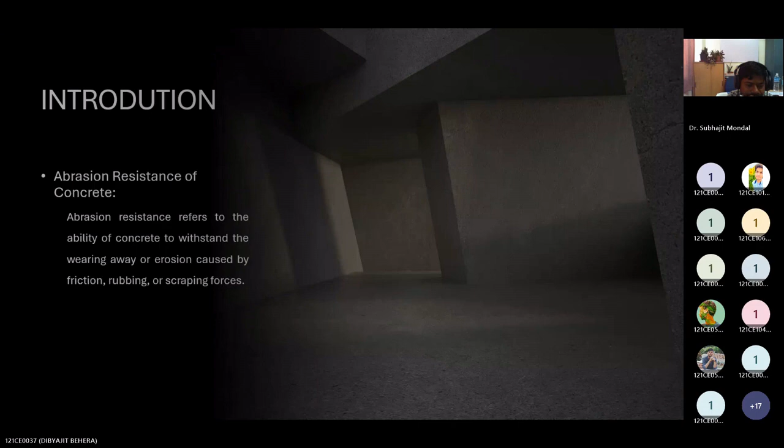Importance of abrasion resistance: first, durability and longevity. In high traffic areas, industrial floors, pavements, and transportation infrastructure, concrete is often exposed to constant friction and abrasion. Improving resistance to wear helps extend the service life of these structures, reducing maintenance and replacement costs.

Next is cost saving. Structures with high abrasion resistance require less frequent maintenance and repairs. Safety consideration: in transportation infrastructure, road surfaces with good abrasion resistance provide better skid resistance, reducing the risk of accidents. In industrial settings, a durable, abrasion-resistant floor contributes to a safer working environment, minimizing the chances of slips and falls.

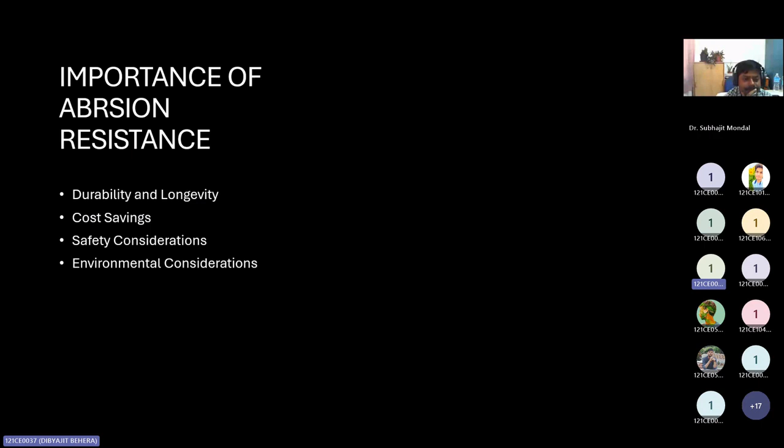Next is environmental consideration. Reduced wear and abrasion means fewer particles are generated from the concrete surface, resulting in less dust and particulate matter. This can have environmental benefits, especially in urban areas where air quality is a concern.

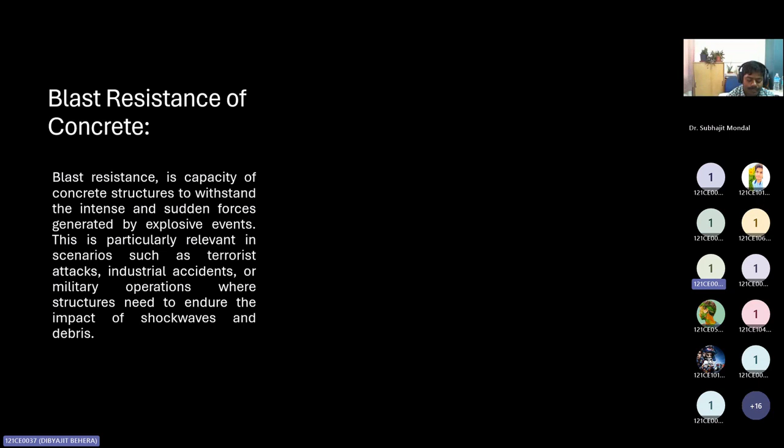So, what is blast resistance? Blast resistance is the capacity of concrete structures to withstand the intense and sudden forces generated by explosive events like terrorist attacks, industrial accidents, and military operations, where structures need to endure the impact of shockwaves and debris. The design and construction of blast-resistant concrete involve considerations such as material strength, ductility, and energy absorption capabilities.

The goal of blast resistance is to create structures that can effectively absorb and dissipate energy during the blast, protecting occupants and preserving the structure of the building.

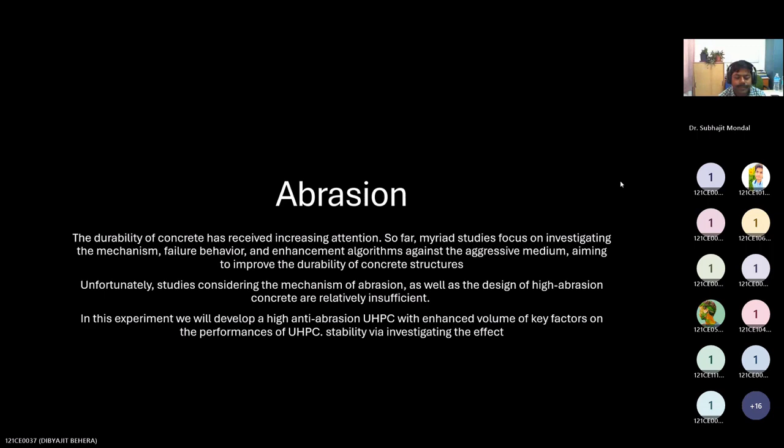Moving on to the next slide, I would like to discuss the factors affecting abrasion resistance.

First and foremost, aggregate types and sizes. It is shown through research and experiments that coarse aggregates and hard aggregates are more resistant towards abrasion materials.

One of the major factors which plays a crucial role in abrasion resistance of concrete is the cement content and its type. It is shown through research and experiments that concrete having a high cement content has more abrasion resistance.

One of the other factors is the water cement ratio. A high water cement ratio causes high porosity, increasing the voids in concrete, which is more prone to abrasion. So it is recommended that the water cement ratio be kept low so that it adds more resistance against abrasion.

One of the major factors of abrasion resistance is surface finishing. It plays a crucial role, because if the surface is smooth, it will have less friction against wear and tear from abrasion materials, making it highly resistant against abrasion.

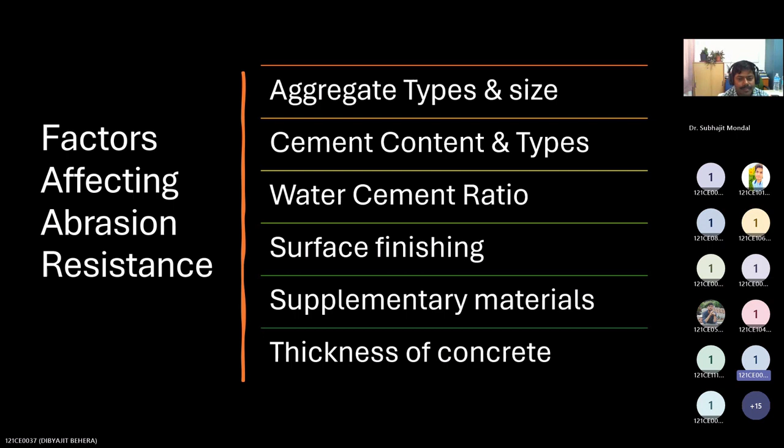Other factors include supplementary materials and thickness of concrete. There is a lot of influence of aggregates and cement type on concrete, such as in rubberized concrete, which showed better abrasion resistance than the control mix.

Water cement ratio did not significantly influence abrasion resistance, with higher ratios resulting in increased resistance. Weak bonding between cement paste and crumb rubber did not affect abrasion resistance, despite impacting compressive strength.

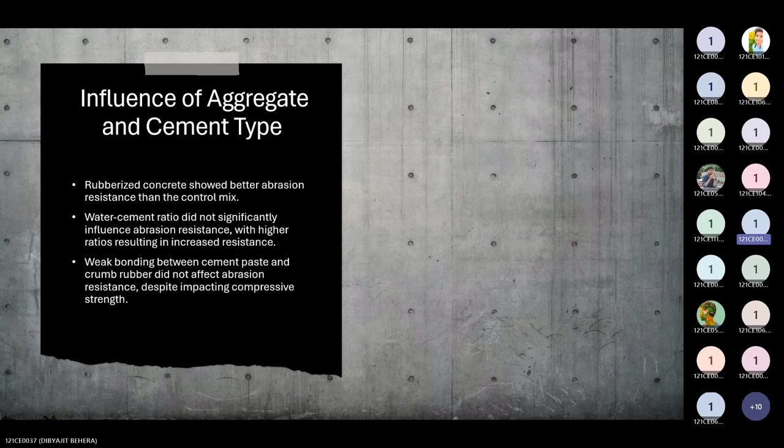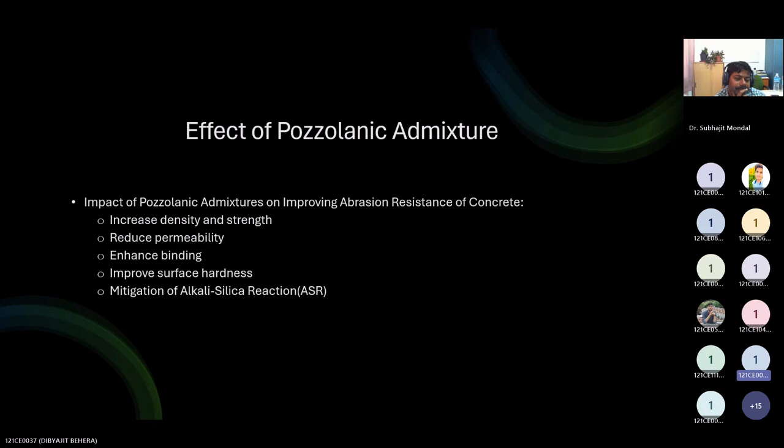Pozzolanic admixture is a material that, when added to concrete, reacts with calcium hydroxide and forms cementitious materials, which benefit the concrete by increasing its density and strength, reducing its permeability, enhancing binding, improving surface hardness, and mitigating alkali silica reaction, leading to high abrasion resistance of the concrete.

Now I would like to discuss recommendations for improving abrasion resistance. First, aggregate selection: we have to mind the aggregate selection by choosing coarse aggregates and harder aggregates so that the concrete has more resistance towards abrasion.

We have to use pozzolanic admixtures, for example fly ash and silica fumes, so that it has more resistance against abrasion. We have to adjust the water cement ratio and enhance the surface finishing, making it more smooth so that it has less wear and tear against abrasion materials.

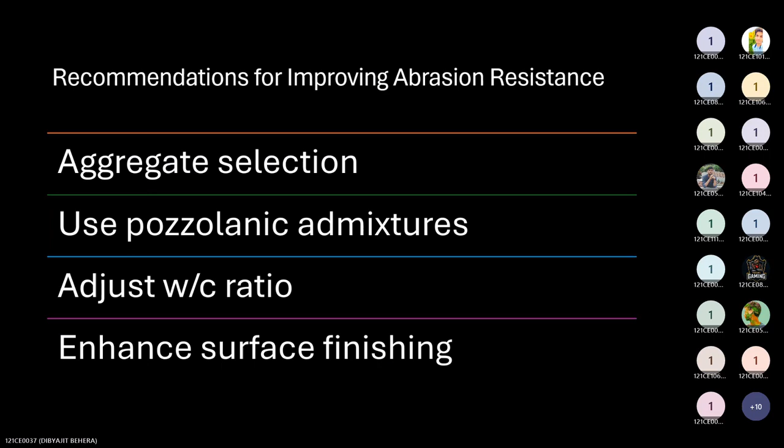In this research, we are mainly focusing on three experiments. First is ASTM C944. This test involves rotating a cutter assembly against the surface of a concrete specimen under a constant load. The mass loss of the specimen is measured and used to calculate the abrasion resistance.

Another experiment is ASTM C1138. This test involves the use of a specified abrasive material, such as carborundum grit, under controlled conditions to abrade the surface of the concrete specimen.

Last but not least, the ASTM D968 experiment. This test involves dropping abrasive particles onto the coated surface under controlled conditions. The extent of the coating wear or damage caused by the falling abrasive is then evaluated to determine the abrasion resistance.

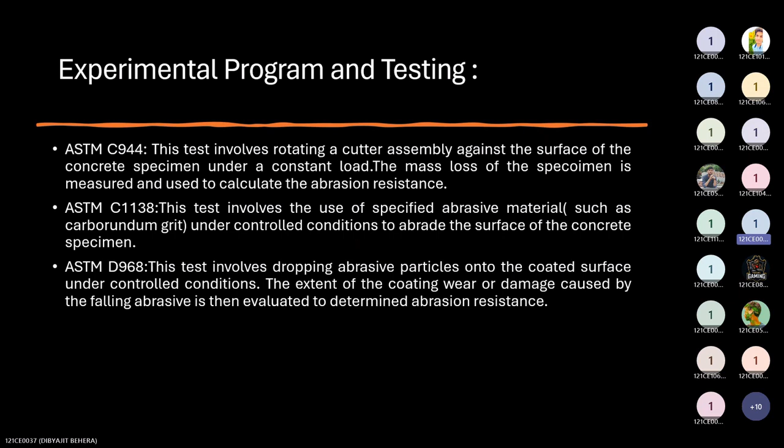Now, the results from the abrasion resistance test include mass loss, a common parameter used to quantify abrasion resistance. It represents the weight of material removed from the surface of the specimen during the test. Another such result is volume loss, which accounts for the physical loss of material from the surface and is often calculated based on the geometry of the specimen and the measured depth of wear.

Last but not least, the abrasion resistance index. This index allows for easy comparison of abrasion resistance among different materials and mix designs.

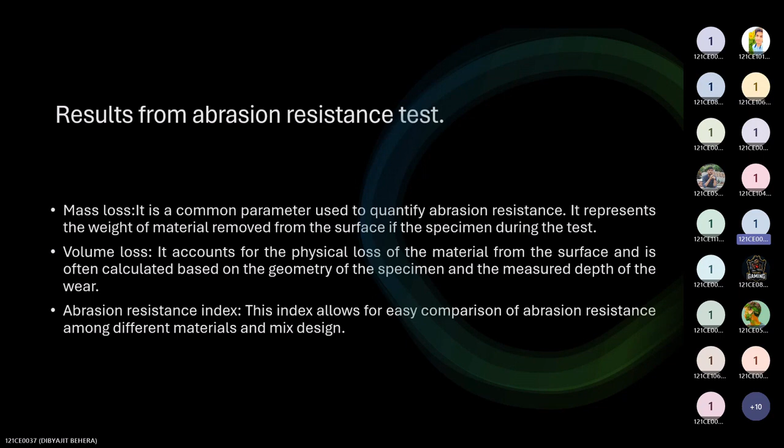Now I am going to discuss blast resistance. First I will explain what blast resistance is and what its importance is in various applications. So what is blast resistance?

Blast resistance is the capacity of a structure or material to withstand the effect of an explosion or blast event without significant damage or failure. This includes the ability to endure high pressures, shock waves, fragmentation, and other destructive forces generated by an explosion.

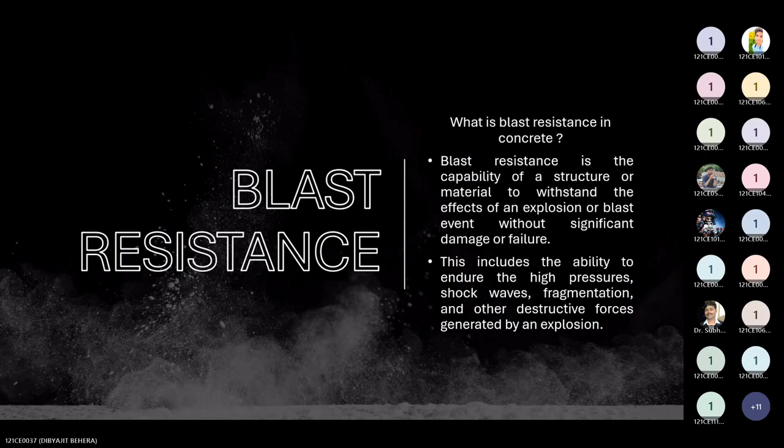Moving on to the next slide. These are the various applications in which blast resistance is important. First of all, military bunkers. Military bunkers are designed to provide protection and supplies during combat or in the event of enemy attack. So blast resistance of concrete is essential for military bunkers to withstand the force of explosion from artillery and bombs.

Then there is nuclear power plants. Concrete is used to construct critical structures such as containment buildings and reactor facilities. Blast resistance is vital to ensure the structure can withstand potential hazards, including both internal and external explosions.

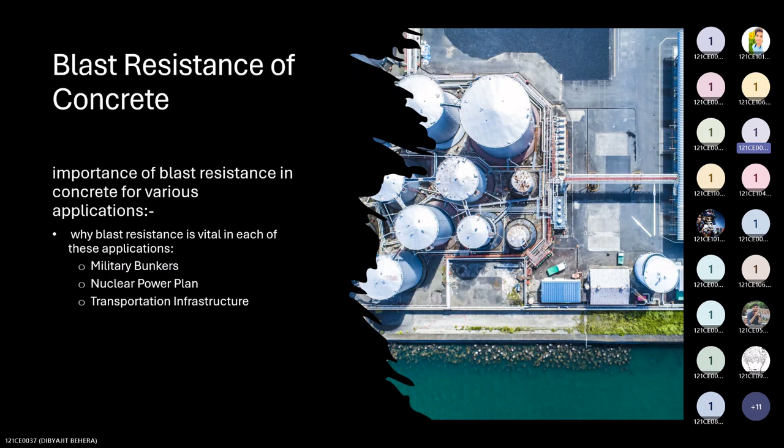Then there is transportation infrastructure. Blast resistant concrete is essential for transportation infrastructure such as buildings, bridges, and tunnels. Now, moving on to the next slide.

In this slide, I am going to discuss tests on blast resistance in concrete. There are various tests performed in order to improve blast resistance in concrete. First of all, there is the shock tube test. In this test, materials or structures are placed inside the shock tube, and the effect of blast pressure and impulse loading can be measured and analyzed.

Then the explosive test. In this test, explosive material of varying size and type is placed at different distances from the target structure or material to find the impact of explosion. Then there is the ballistic pendulum test, which involves firing projectiles at high velocity into the material or structure to simulate blast effect.

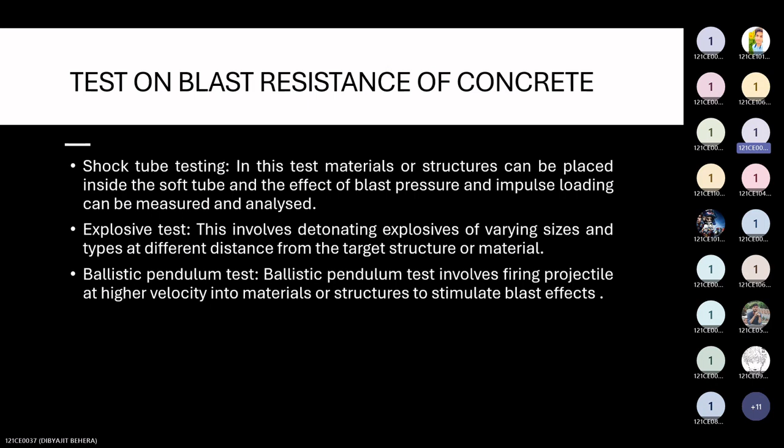There are other tests like the blast chamber test, scaled model test, and fragmentation test in order to improve blast resistance in concrete. Moving on to the next slide, these are the experimental setups for the various experiments.

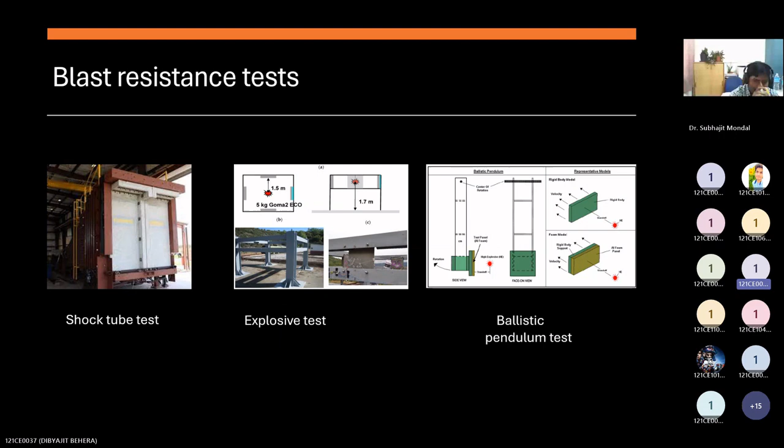Here are some potential findings that may result from blast resistance tests: first, structural integrity; then deformation and displacement of structural elements or material; then damage assessment, where the severity and extent of damage can provide insight into structural performance under blast loading; and then energy absorption, which can indicate the capacity of a structure to dissipate energy and resist progressive collapse.

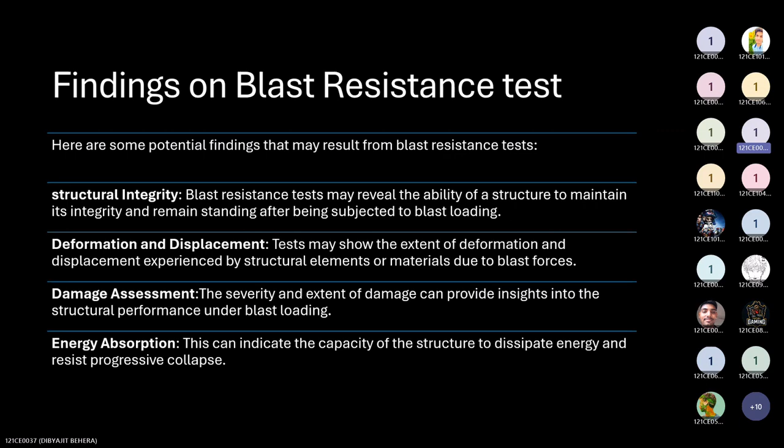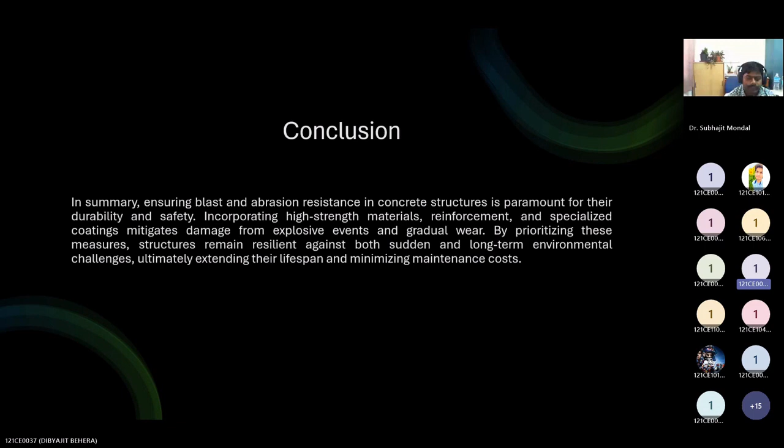In conclusion, ensuring blast resistance and abrasion resistance in concrete structures is essential for their durability and safety. Incorporating high strength materials, reinforcement, and specialized coatings mitigates damage from explosive events and gradual wear. By prioritizing these measures, structures remain resilient against both sudden and long-term environmental challenges, ultimately extending their lifespan and minimizing maintenance costs. With this, I would like to conclude our presentation.